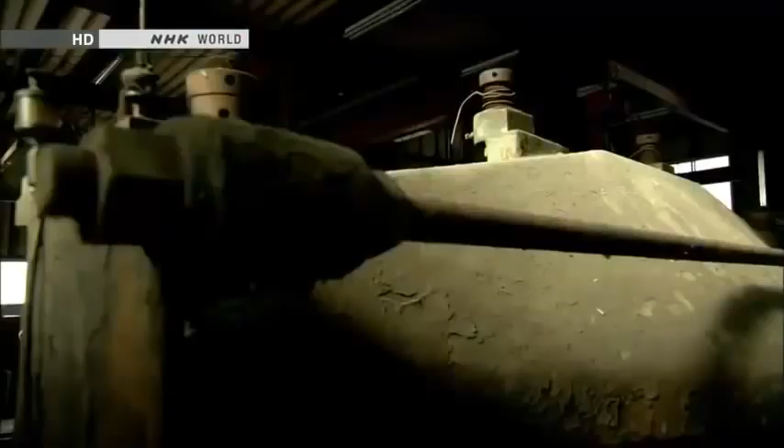In a workshop near Mount Fuji, a curious being has appeared. It's 3.8 meters tall and weighs 4 tons. It is a giant humanoid robot named Kuratas.

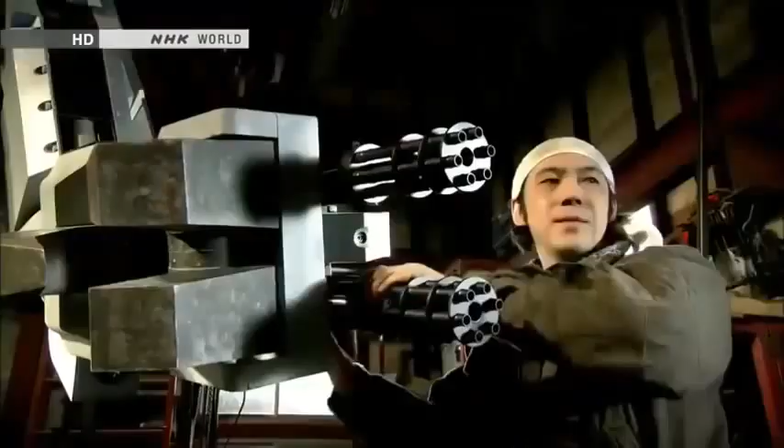Kuratas is a contemporary artist's creation. He holed up here for 2 years, building the robot with input from an expert.

He calls Kuratas a work of art, but it's a sophisticated piece of machinery. A person seated inside can control the robot, move its limbs, and grab things.

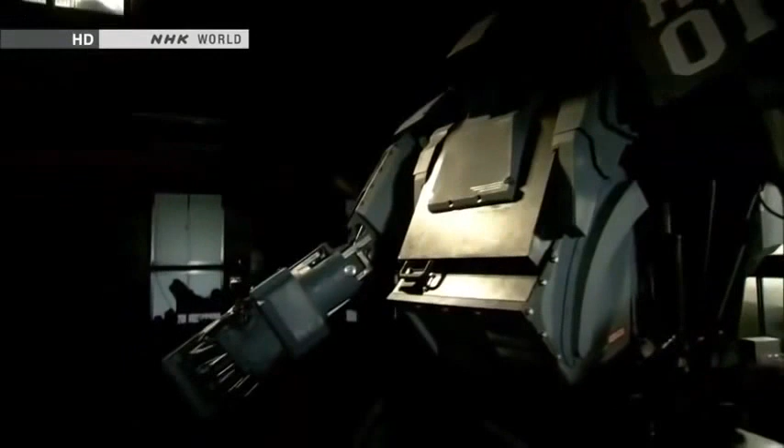The artist says he was inspired by robots in science fiction tales and animation. That vision sustained him as he worked in solitude.

Things that were once unthinkable are becoming real. How will robots evolve? Well, military applications could be one option. They'll probably become more and more like humans. They could surpass us in strength and ability.

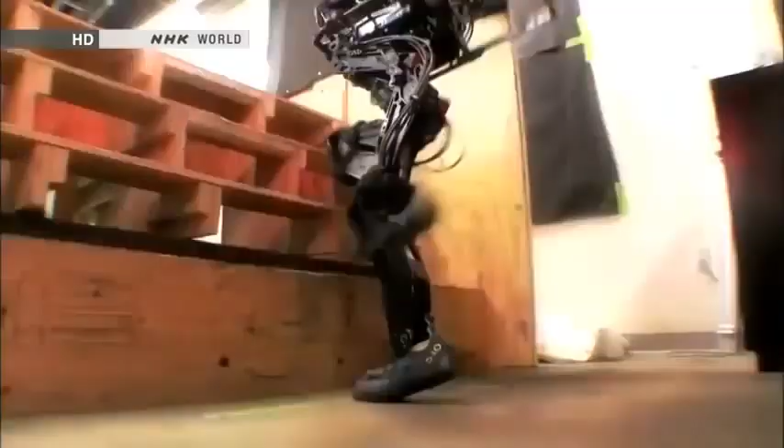People long dreamed of creating these extreme machines. Now, humanoid robots are here. They think like we do, move like we do, and even sacrifice themselves for us.

We want our robot to change society, because robots must be useful. Electronics and computing, progress in vision systems, there's many pieces of it. We will see much more capability continue to grow.

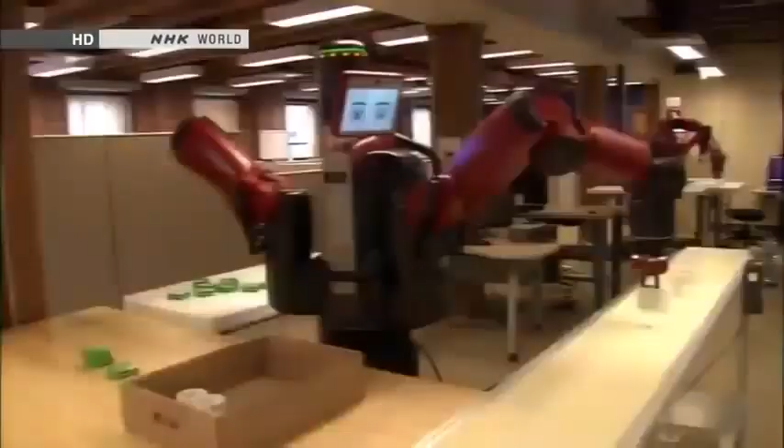Since the Industrial Revolution, people have entrusted some jobs to machines. But there may come a day when humanoid robots do much more complex jobs. Then, what will people do?

You'll see more and more robots doing things in society, whether it's manufacturing or service applications or home healthcare applications. The key will be skillfully dividing labor between humans and humanoid robots.

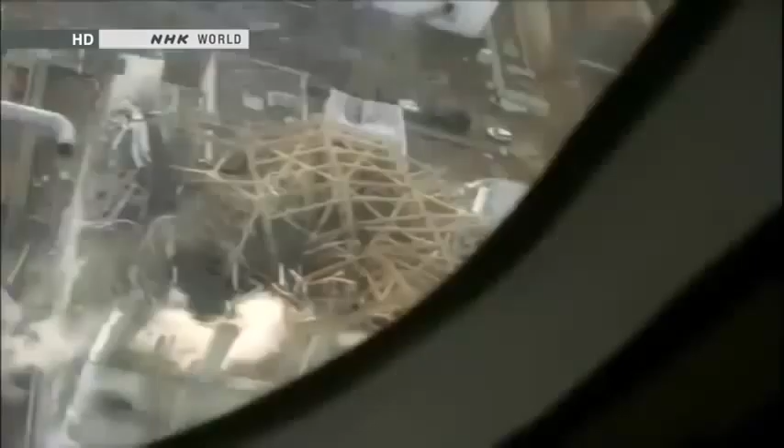The disaster that hit Japan in March 2011 accelerated efforts to develop robots with human traits. The Fukushima nuclear accident left people powerless.

Robots can take over when things become dangerous. They can plow through rubble, climb ladders, even make repairs. People are turning to humanoid robots to handle all of these tasks.

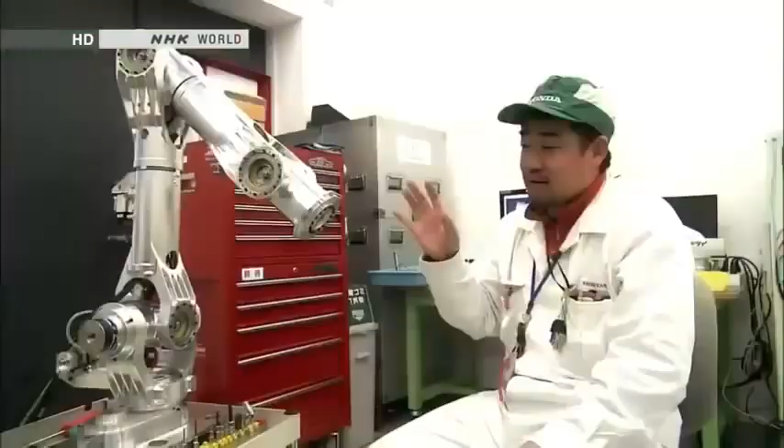We're eager to launch it soon to end the crisis. By joining forces, we can make a truly useful contribution.

Only a humanoid could do it. Or the day will come when robots will really assist mankind. The nuclear disaster in Japan sparked explosive advances in humanoids at the front line of robotics development.

This program explores the future that's fast approaching.

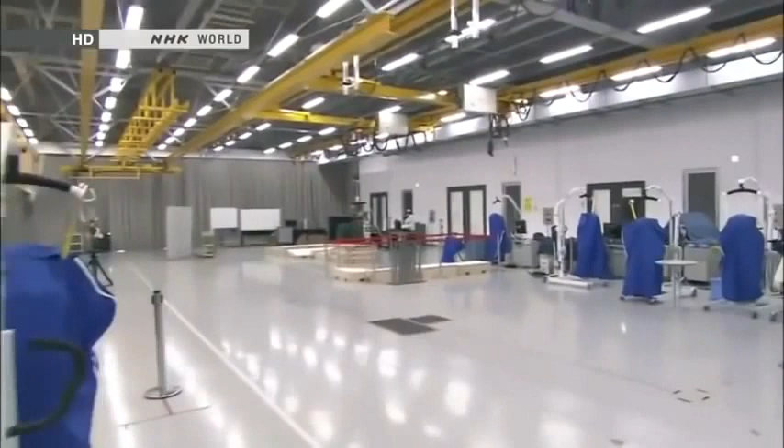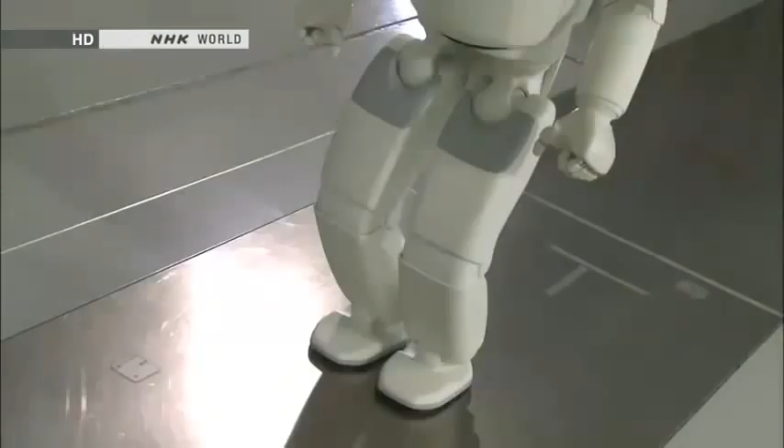Japan is a worldwide leader in the development of humanoid robots. Asimo is the country's crowning achievement. Engineers continue to make improvements.

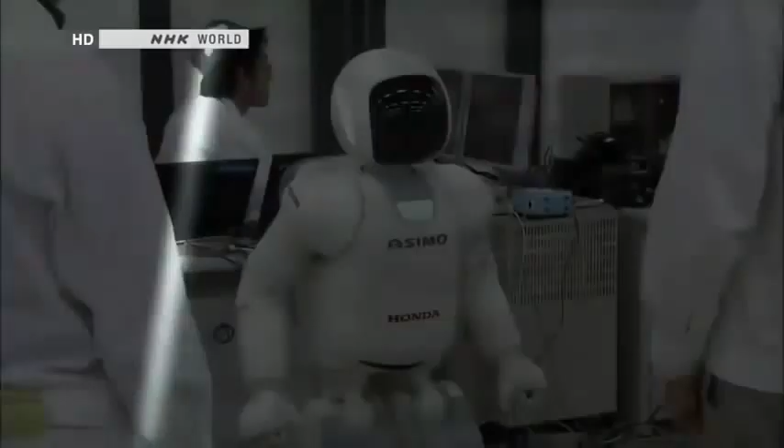Asimo's most innovative feature is its advanced intelligence. The robot can think and act on its own without human intervention. That's made possible by sensors that replicate our 5 senses.

Asimo's head contains 8 microphones. It uses them to listen and engage in conversation.

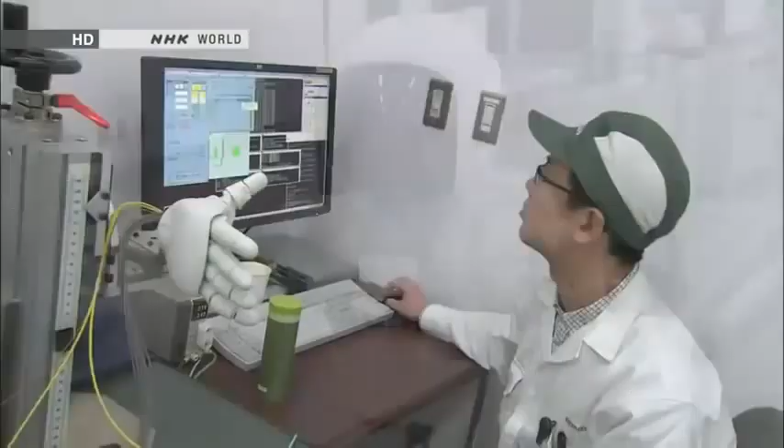Asimo also has a sophisticated sense of touch. Its fingers can make subtle movements, like a person's.

Sensors are embedded in the fingertips, too. They can gauge the hardness of an object, like human fingers do.

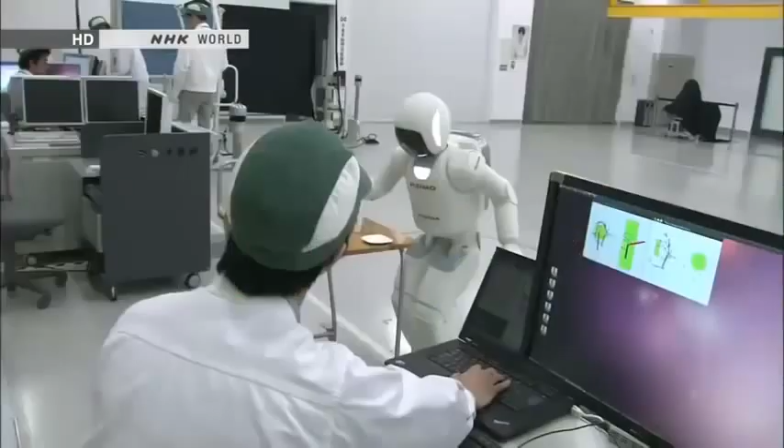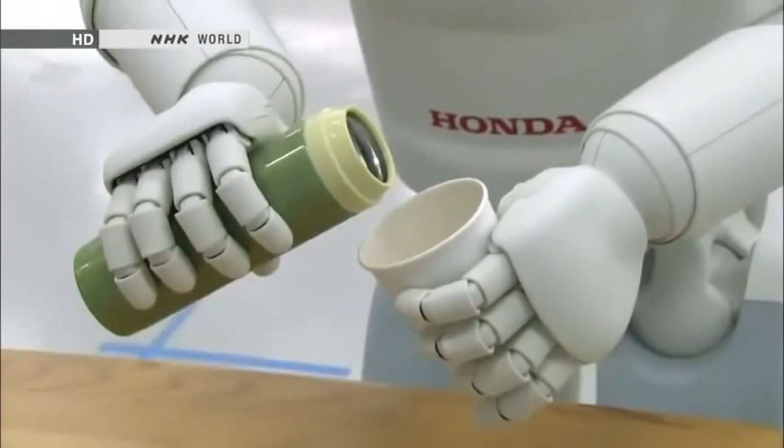Most robots use a fixed amount of strength to grab things. But Asimo exerts more power to open a tightly sealed water bottle and less when holding a paper cup. Its artificial intelligence uses information from the fingertip sensors to adjust the grip.

The developer's ultimate goal is for Asimo to be a valuable partner that coexists with humans.

The engineers who created Asimo all grew up watching animated shows about robots, such as Astro Boy, Doraemon, and Gundam. They dreamed of someday making their own.

Satoshi Shigemi is the development team's leader. He has been designing robots for the past 16 years.

From the beginning, we wanted to design a robot that could help people. To realize that dream, we're constantly asking ourselves, what kind of robot would be able to change society, make people happy, and make life easier for people around the world?

Our idea is to create a robot that will change how people live. We're working through the technological issues, one by one, in order to reach that goal.

Asimo's advanced physical capabilities are revolutionary. The robot can walk and run. It can reach speeds of up to 9 kilometers an hour.

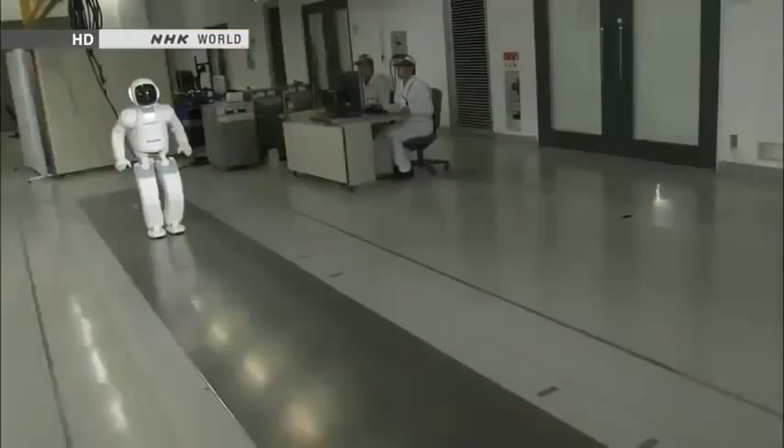For robots, walking is much easier than running. When running, both feet momentarily leave the ground. Balancing in mid-air is no easy task.

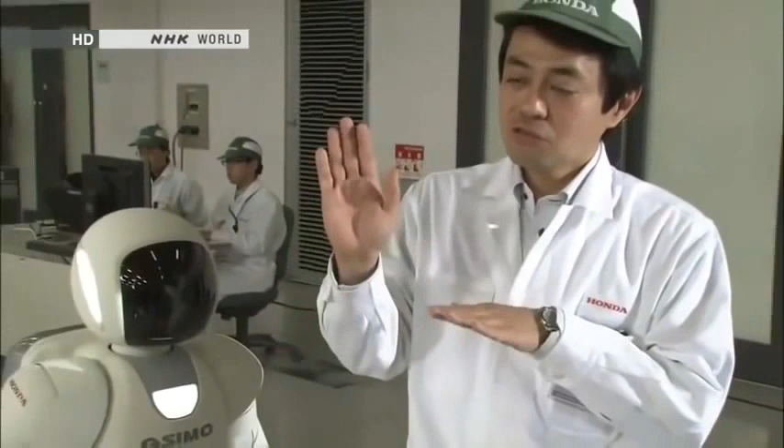Maintaining posture while jumping or floating in the air was a major technological breakthrough. Asimo leans its upper body slightly forward to maintain overall balance. It goes forward straight in the air. Sensors in Asimo's waist measure the robot's angle. It leans slightly to compensate, forward or back, side to side. That's how it stays perfectly balanced in the air.

Asimo has been evolving ever since development began in 1986, much like a growing child. But something happened that made researchers realize Asimo's real-world limitations.

It was the accident at Tokyo Electric Power Company's Fukushima Daiichi nuclear plant. The damaged reactors released radioactive substances, making it difficult for humans to deal with the crisis. People needed something that could confront the dangers and bring the plant under control. Robots.

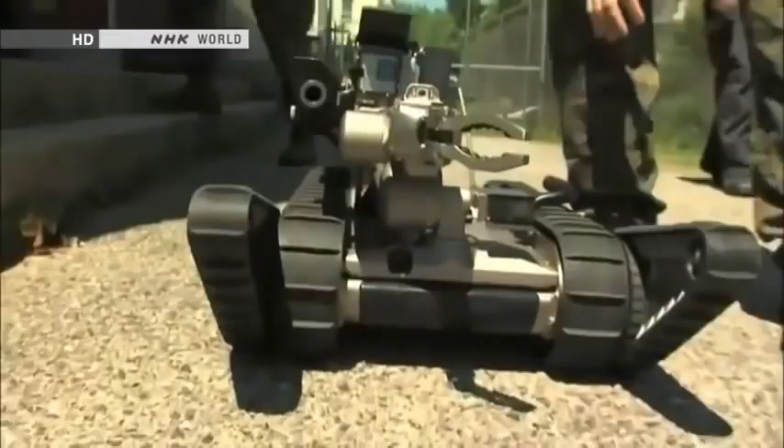Japanese officials sent a request for robots developed by the U.S. military. The robots were sent to Fukushima in April 2011. They recorded images inside the damaged reactors.

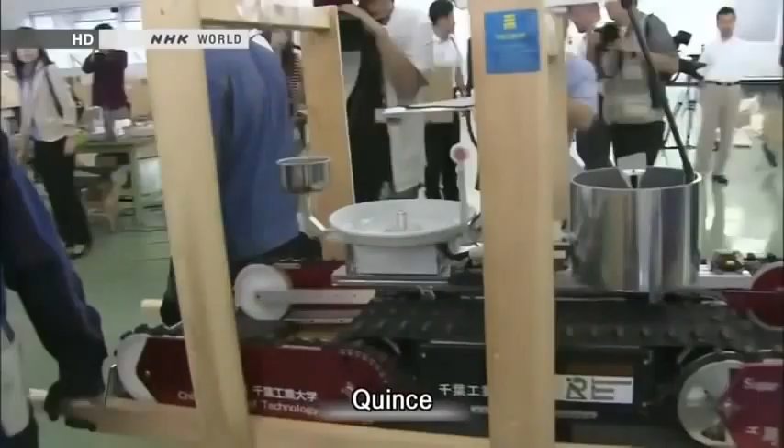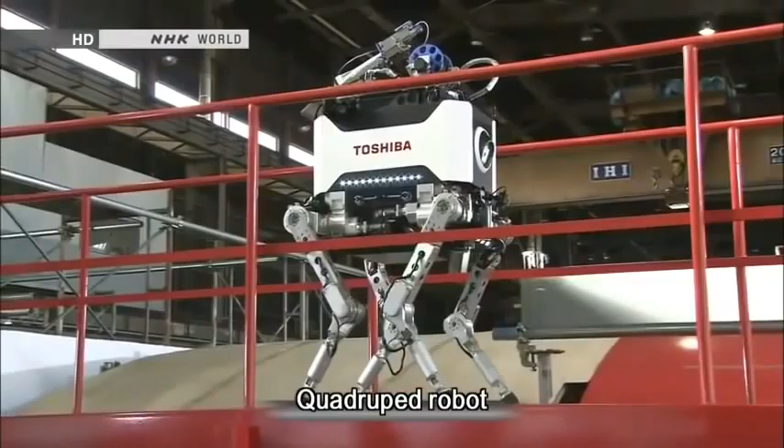Since then, a variety of Japanese robots have been enlisted as well. Robots have proven to be useful, but 2 years after the accident, they're only used for inspections. They're not able to do all the work of humans.

What about Asimo? Right after the disaster, people flooded Honda with phone calls and emails asking the company to send Asimo to the Fukushima plant. But Asimo wasn't up to the task. It could move nimbly over an office floor and other flat surfaces, but large vertical gaps and obstacles were a different story.

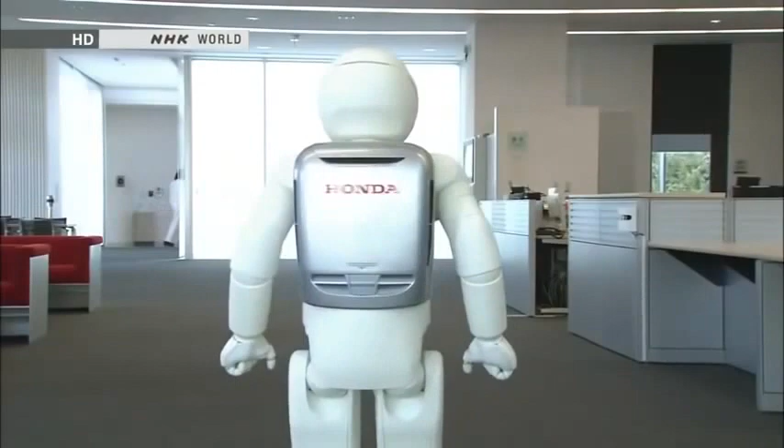We heard from many customers. We ourselves regretted that Asimo couldn't be of help. It was obvious that the Asimo we had built wasn't ready for real-life action. We realized right away that we needed to make something different, something new that could offer immediate assistance.

Honda wasted no time. Company officials offered to create a robot free of charge to assist TEPCO in the recovery. TEPCO accepted. Officials asked for a robot that could open or close valves inside the nuclear plant.

We wanted to flush out radioactive materials that remained inside the pipes and bring down radiation levels in the facility. That was our first goal. Unless we opened or closed the valves, the area would remain highly radioactive, and that would prevent workers from entering the facility and impact the entire decommissioning schedule.

How many valves are there? Each unit has from several thousand to tens of thousands of them. In July 2011, 4 months after the accident, Honda began designing a robot for use at the nuclear plant.

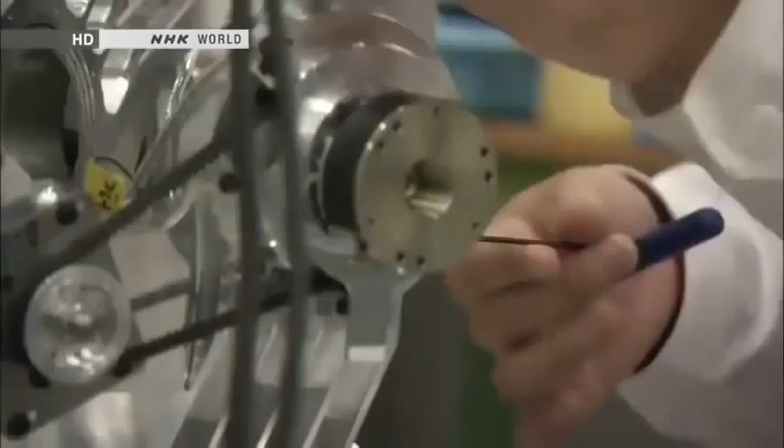Members of the Asimo team were put in charge of the project. A humanoid robot would take too long to build, so engineers focused on making a robot specifically for operating valves. Asimo was crucial to their efforts. Its ankles employ advanced balancing technology. Developers reasoned that using it would allow the new robot to work inside rubble-filled reactor buildings.

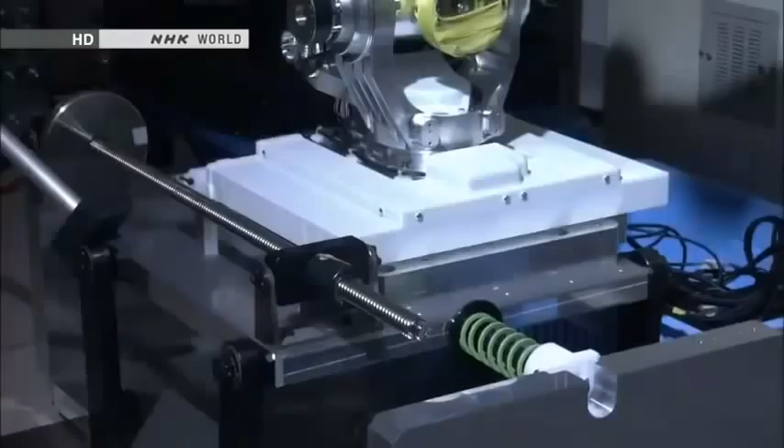The team worked exceptionally fast, completing a prototype in just 4 months. They turned Asimo's leg into an arm for operating the valves. Even when the base moves, the arm remains steady. So far, so good.

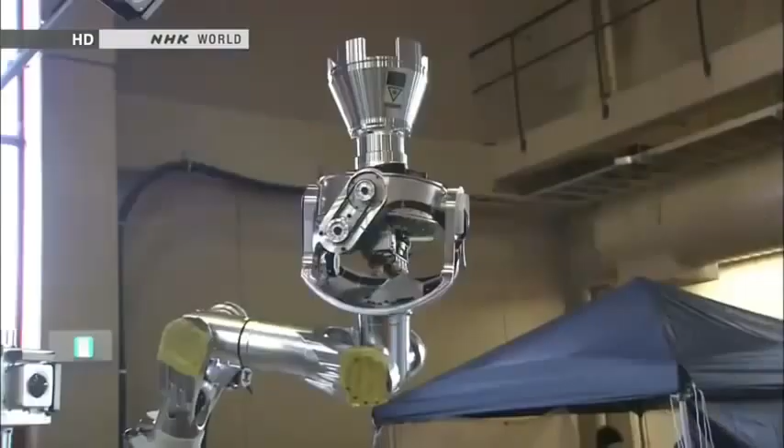Officials from TEPCO evaluated the prototype at the National Institute of Advanced Industrial Science and Technology. The government-backed group for cutting-edge research contributed to the development effort. A TEPCO official couldn't take his eyes off the robot's movements.

We may be quite demanding. That's okay. We might be quite direct. The test is designed to replicate conditions inside the nuclear plant.

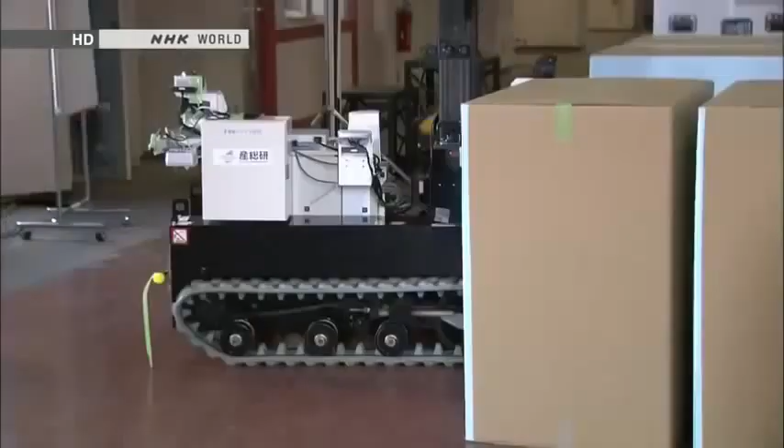The robotic arm is remote controlled. Testers send the arm toward one of the valves. There are a number of unknowns, including the condition of the valves. They may have rusted since the accident. A valve might break if the robot applies too much force, or it might not budge at all.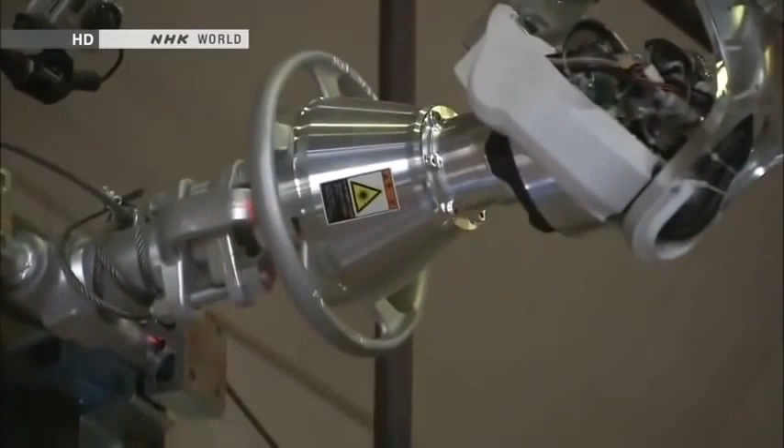The robot uses just the right amount of force and turns the valve on the first try. It's passed the test. This robot can do more than inspections. It could help in the recovery effort.

From what we've seen, the robot seems near perfect. We want to use it as soon as the need arises. It's important that we quickly do what we can to make that possible.

The Fukushima accident also encouraged U.S. developers to design emergency response robots. Department of Defense officials have spearheaded the effort. Before, they had shown little interest in humanoid robots. Now, they view them as vital for disaster response. The architect of the new strategy is Gill Pratt of DARPA. He oversees funding for leading-edge research at the Department of Defense.

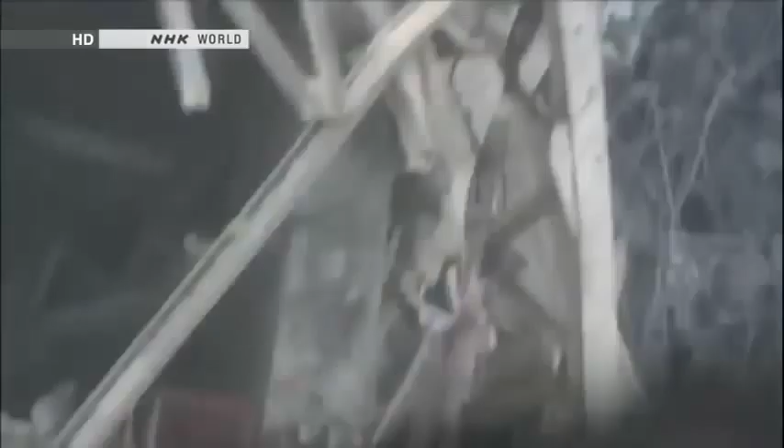There are many aspects of disaster response in Fukushima that inspire people in robotics to work on new capabilities. If they were able to take action during those first 24 hours, then the first reactor maybe would not have blown up in an environment that is too dangerous for a person to do.

What's important to us is that the robot is compatible with human environments, compatible with human tools, and also compatible with human operators without special training. As a result of that, the easiest form that comes to mind is the human form. DARPA is backing the development of a humanoid robot for catastrophes, such as nuclear power plant accidents.

This company is leading the development work. It has already built several military robots. Okay, I'll show you the current status of the robot.

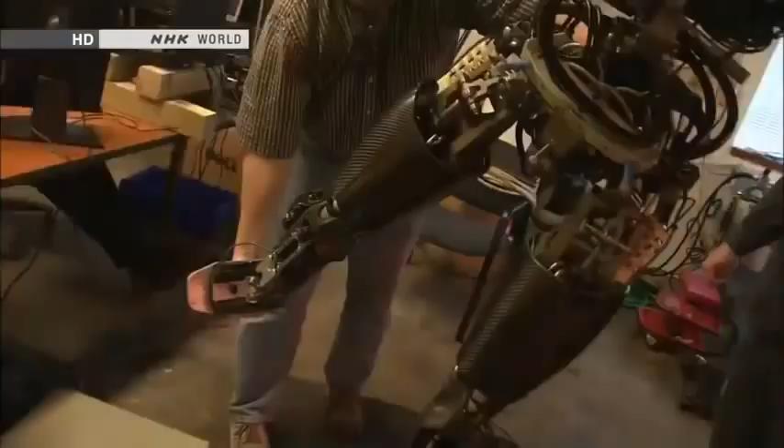This is the first American-made humanoid robot for disaster response. It's called Atlas. Before, U.S. designers had focused on robots with specialized functions.

Why the sudden interest in humanoid robots? Traveling over debris, prying open valves, using tools for repairs. Performing multiple tasks like these is impossible for specialized robots. Crises also require robots that can navigate doors and stairs. Humanoid robots are ideally suited for such situations.

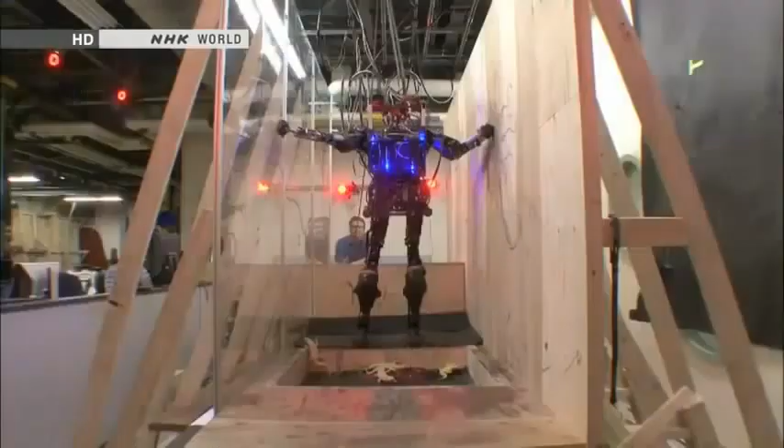Tests of this prototype were going smoothly. It can easily climb stairs and jump from a height of nearly 1 meter, and can negotiate obstacles using its arms and legs. It can already handle more demanding environments than Asimo can.

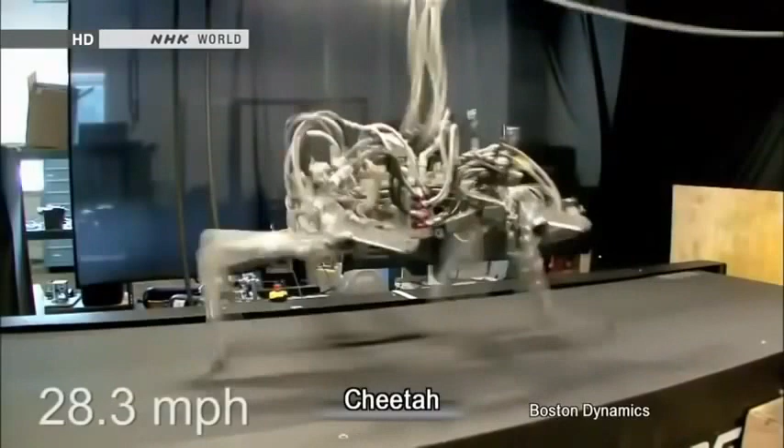Atlas is loaded with technologies originally designed for military robots. A quadruped robot called Cheetah can race through a battlefield at 45 kilometers an hour. LS-3 is for transport; it can carry heavy supplies for soldiers.

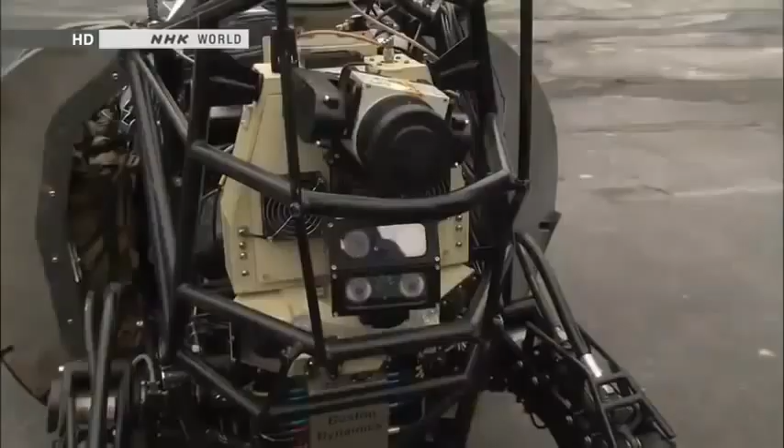The ferocious-looking robot gets its strength from a powerful hydraulic drive system. A hydraulic device can be small, yet quite strong. The black cables convey hydraulic power to the legs, generating the brute force required for harsh conditions on the battlefield.

A web of hydraulic cables covers Atlas's body. They form a muscular suit of armor for clearing debris.

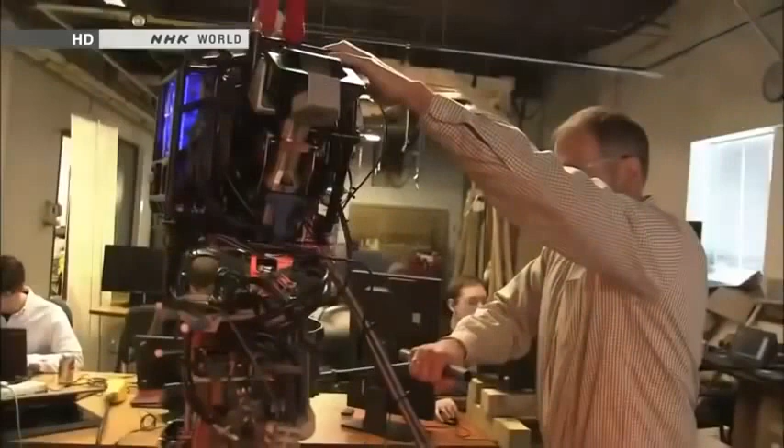Another important technology comes from military robot engineering. This machine's joints have a wide range of motion, allowing for flexibility that humans can't achieve. Atlas's joints are capable of moving in 28 different ways. Atlas can crawl through narrow spaces and withstand sudden shocks.

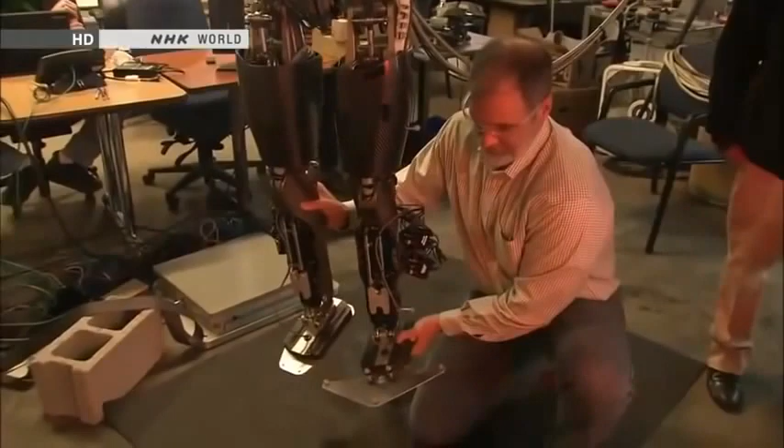Then we have the knee. This has 3 in the hip, just like us - this way, and then this way. I am very impressed with the number of degrees of freedom; it will be able to do these human-compatible tasks without a lot of the limitations that other robots have.

Engineers will combine Atlas's rugged body with sophisticated artificial intelligence that's almost near completion. They aim to complete the robot by December of next year.

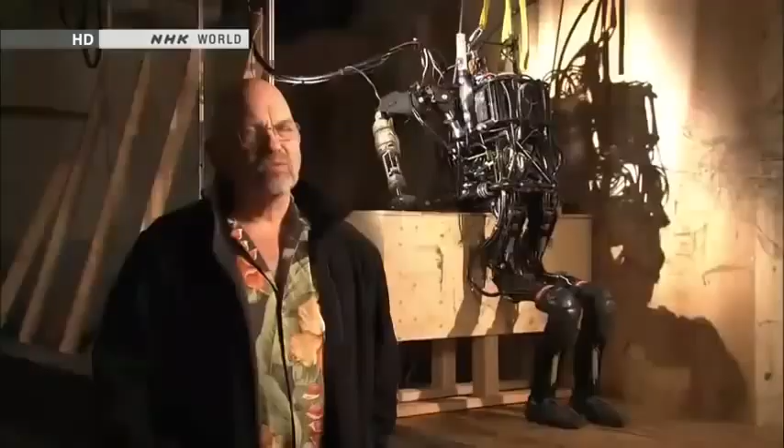One reason you see humanoid robots is because there are some people working who are really interested in robots as an entertainment thing or as a performance thing. I think that's different. We're much more interested in basic capabilities for emergency response, rescue. So I don't think Asimo has been designed to do those things yet.

U.S. engineers stepped up their efforts to develop humanoid robots after the nuclear accident in Japan. Japanese researchers are embracing the same mission.

In November 2012, robot engineers from around the world gathered in Osaka for an international conference on humanoids. Gill Pratt from DARPA was one of the participants.

He came to invite engineers to join a project sponsored by the U.S. Defense Department. On March 11th, after 24 hours, if only a robot had been there to go and open that valve, the entire disaster could have been averted. But we didn't have one, and furthermore, we didn't have anyone that could do the job. So shortly afterwards, we actually started planning the DARPA Robotics Challenge.

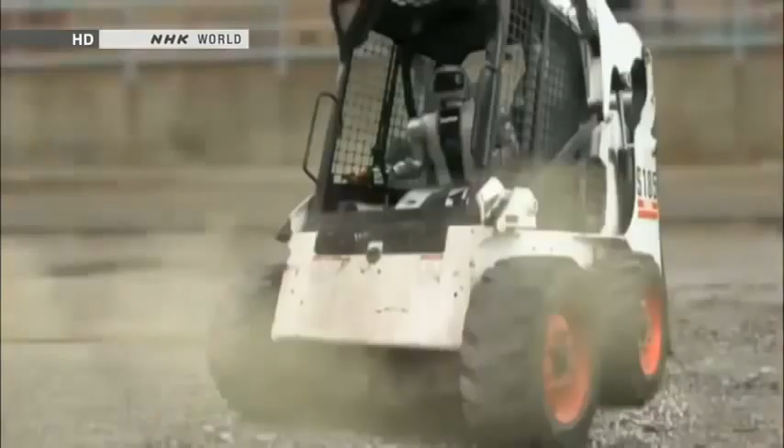The challenge consists of 8 tasks: driving a vehicle to approach a disaster site, walking over rubble, removing obstacles, opening doors, using tools to break down walls, climbing ladders, turning valves, and making repairs.

A single robot must complete all 8 tasks. The development period is 2 years. DARPA will provide contestants with funding of up to $4 million.

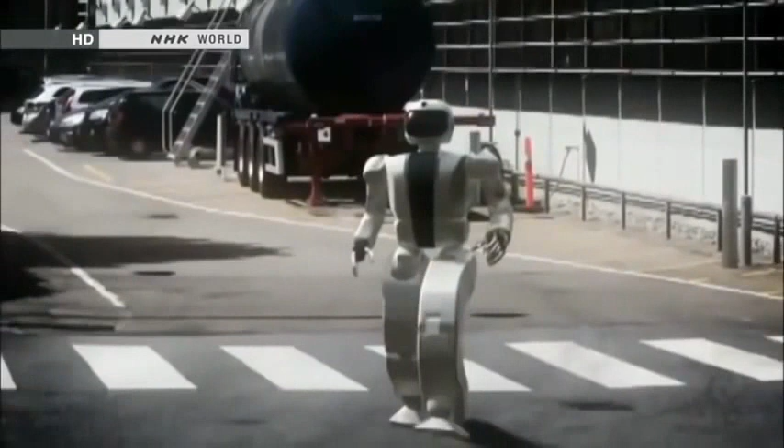DARPA has received over 100 proposals from research groups worldwide. They include renowned organizations like NASA and MIT.

Japan is at the forefront of humanoid robotics engineering, yet its researchers hesitated to throw their hats into the ring.

So actually, to me, it's difficult not to see that some of the results of the DRC are going to be used to advance, as you say, advanced military technology.

The DRC is about developing robots that I believe wholeheartedly are completely impractical for military purposes, for offensive military purposes. Will the technology that we come up with find its way into military systems? Probably yes. But I guarantee you that if you work on a robot for healthcare, there's a chance that technology will also find its way into military systems.

The members of one Japanese research institution wanted to take part in the competition.

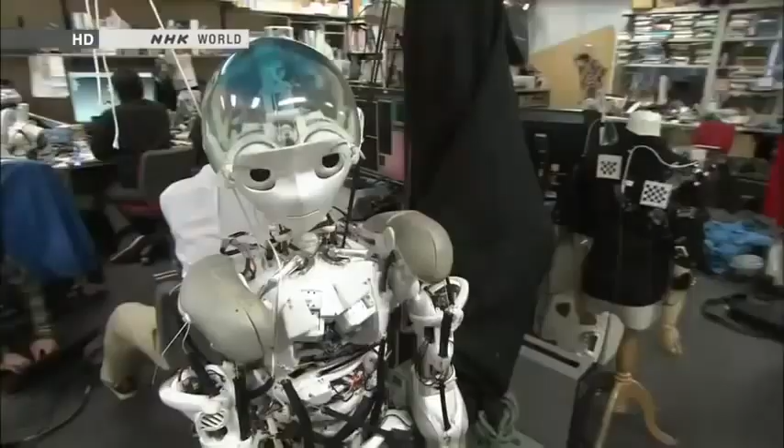They worked at the University of Tokyo's robotics lab. Researchers there, along with those at Honda, are global leaders in robotics engineering. But they faced a major obstacle to competing: the university bans military-funded research. Three researchers made a decision. They told the university they were leaving, then decided to set up a venture company and enter the DARPA Robotics Challenge.

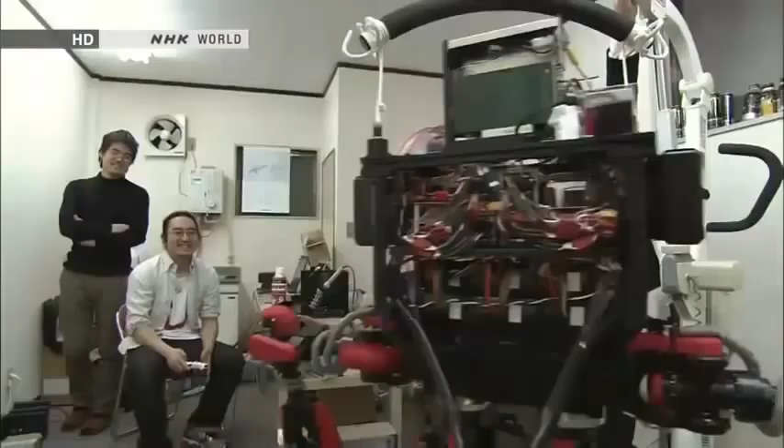They couldn't shake the feeling that they should leave their quiet university lab and help resolve the nuclear crisis. Six months after launching their venture, the team had just completed a prototype with help from university graduates. Its long arms can exert 10 times more force than those of conventional humanoid robots.

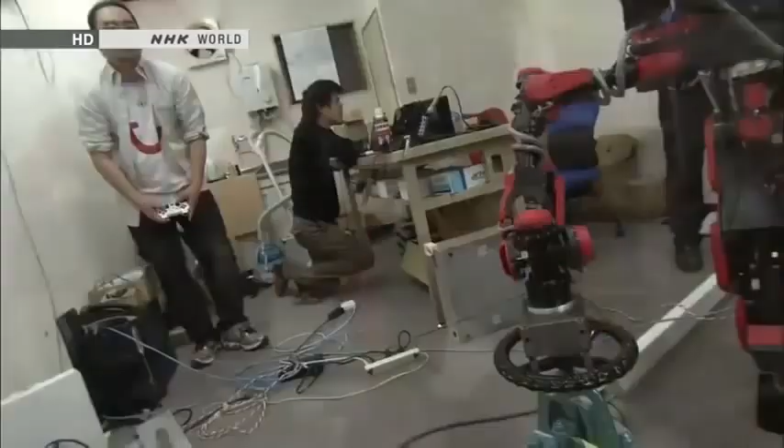It's too tight to turn with one hand. It can easily turn a valve that's too tight for a person to turn. The strong force comes from a large electric current that pushes the motors to their maximum limits.

A reddish fluid circulates through the robot's body. The fluid serves as a coolant that keeps the motors from overheating. The cooling system should enable the robot to perform hours of grueling work at disaster sites.

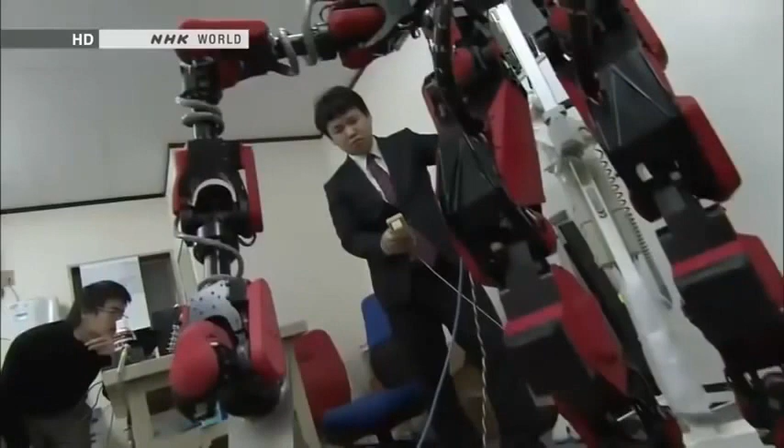The time has now come for the developers to apply their years of research to the real world. A nuclear crisis has happened here in Japan. Radiation is escaping. Researchers in every field must wonder at least once if the technology they've been working on could help resolve the crisis. By joining forces, we can make a truly useful contribution. It's with this in mind that we decided to enter the competition.

One country is quickly catching up with Japan in humanoid robotics: South Korea. KAIST is a government-funded lab for the advancement of science and technology. Researchers there were among the first to express interest in DARPA's Robotics Challenge.

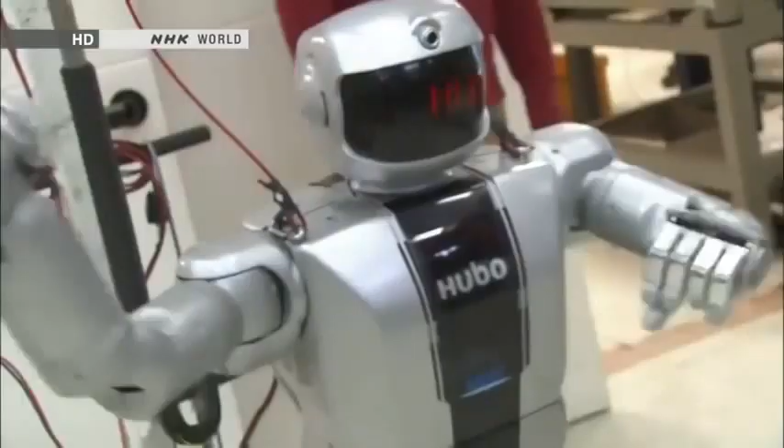This humanoid robot is called Hubo. It's modeled on Asimo, which Honda spent 14 years developing. Hubo was built in just 5 years. Hubo deftly manipulates its hands, and it's also good at dancing. Its moves look just like Asimo's.

Hubo has been undergoing a major upgrade ahead of the competition. It can now bend backward at the waist while walking to handle all kinds of environments. It can quickly pick up tools. The tests were going well.

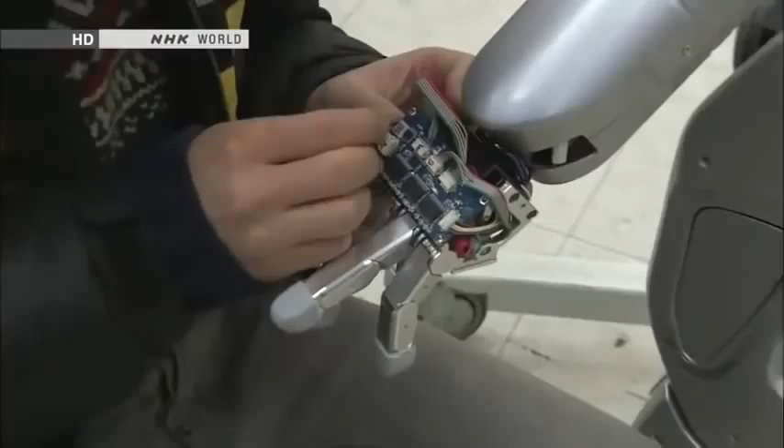People have always compared Hubo to Asimo. Engineers now had a strategy to get ahead of the Japanese developers. They decided to publish certain details about Hubo's design and pursue joint development with researchers at other institutions. One could say that this space inside Hubo's chest captures the heart of their thinking.

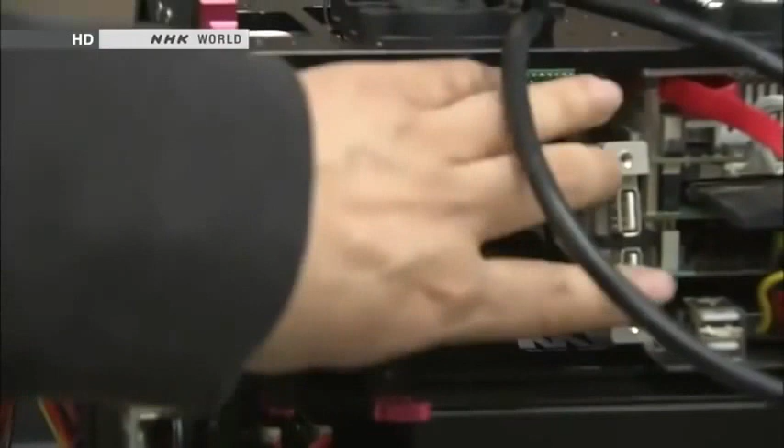It's empty now, but this is where artificial intelligence will be installed. It's removable. Hubo does not yet possess artificial intelligence. Its motions are as sophisticated as Asimo's, but Hubo's movements are all pre-programmed.

U.S. universities that lead research into artificial intelligence will develop a brain for Hubo. The stage has been set for a joint U.S.-South Korean team to compete in the DARPA Robotics Challenge.

Sharing is the key to making technological advancements. That's true in South Korea and in other places too. Research shouldn't be confined to one place. People developing humanoid robots elsewhere are too close-minded.

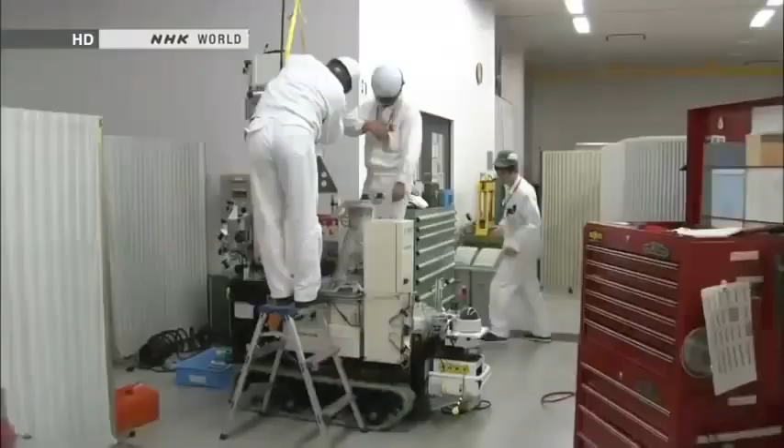Researchers at Honda were also invited to enter DARPA's competition, but they declined. Their energies were focused on designing a robot to tackle Japan's nuclear crisis.

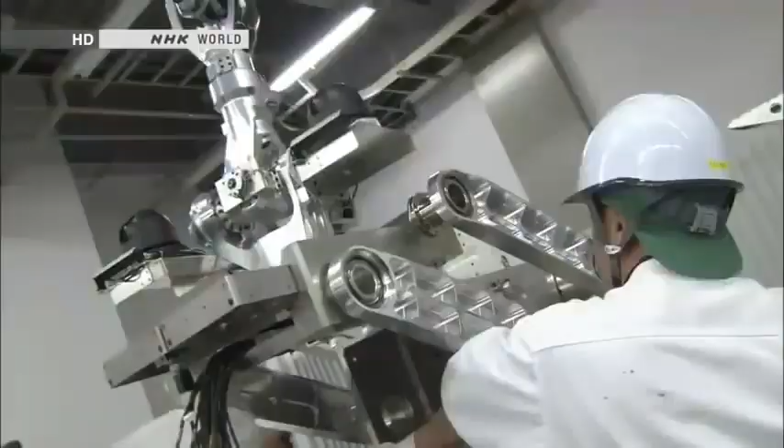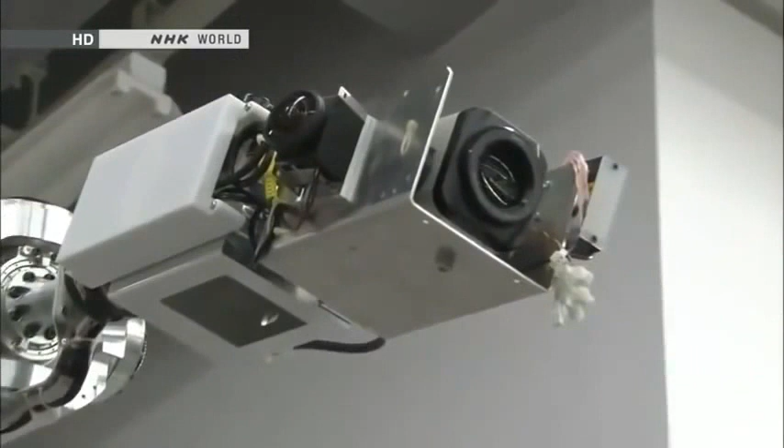Nearly a year has passed since Honda's robotic arm passed evaluation tests, but the device has yet to be deployed to the nuclear disaster site. That's because officials at TEPCO requested a change in specifications. Engineers have replaced the valve-turning hand at the end of the arm with a camera.

TEPCO had changed its plan. Officials decided to put priority on assessing conditions inside the plant's facilities. They said it was too early to have robots work on valves. There wasn't even a recovery plan in place when we were working out the valve manipulation tasks.

Confusion also prevailed at the site. We were expecting valve work to begin 2 to 3 years after the disaster. But the timing has ended up being later than what we'd assumed, 1 month into the crisis.

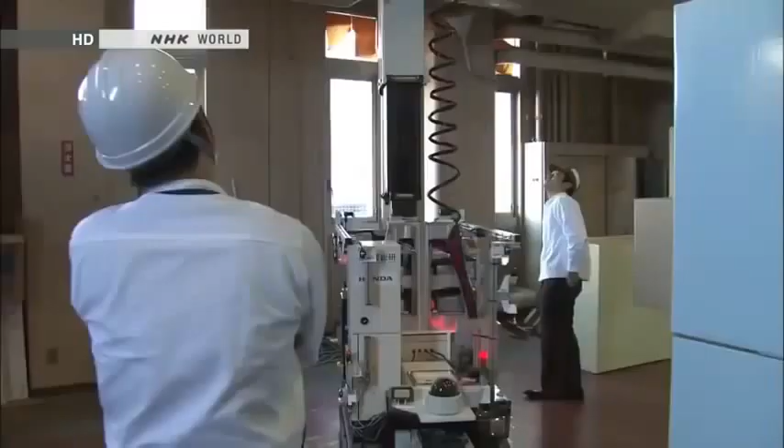The robotic arm will soon be sent to the accident site. It will provide the first images filmed from high up. The robotic arm was not the end of Honda's efforts. Its engineers had another secret mission.

They would develop a new humanoid robot, an updated version of Asimo for use in disasters. The site where the Fukushima disaster took place is dark and off-limits to humans. Only a humanoid robot with both intelligence and motor skills could climb over the debris, get to the accident site, and perform the work of people. In other words, a robot like Asimo.

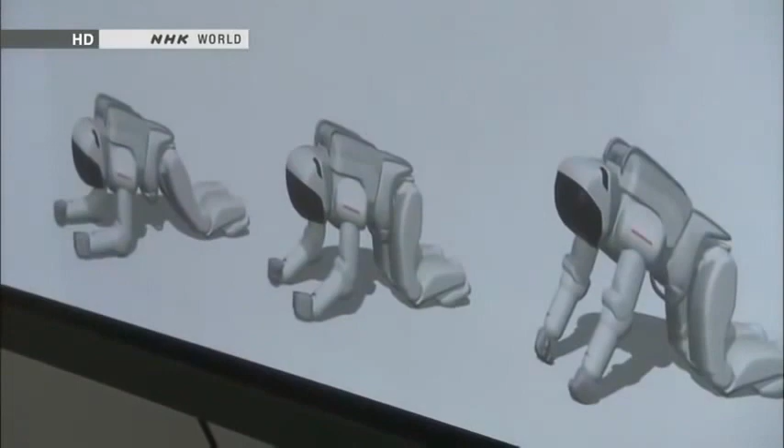Let's use our skills to make a humanoid robot that can tackle disasters. Asimo's engineers were united by this idea. The robot they envisioned would not only walk, but also use its arms to crawl. It would use every means possible to reach its destination. A dramatic update would be necessary.

A disaster reduction robot would be useless if it couldn't get to the site. It's important to get to the scene no matter what. Disasters create all kinds of debris that crumbles easily or breaks when stepped on. It's because it's dangerous that robots replace humans. That's what makes them valuable. A robot that couldn't get to the scene would be totally useless.

Honda's engineers began developing robots in 1986 with the goal of making people happy. 27 years of research is now being put to the test. As we saw in the Fukushima Daiichi crisis, the bottom line is that robots can stand in for humans in places that we can't go to, or that are too dangerous. I am committed to delivering what's needed, when needed, in the shortest amount of time.

The accident in Fukushima spurred the development of humanoid robots around the world. The disaster also prompted people to question the roles of humans.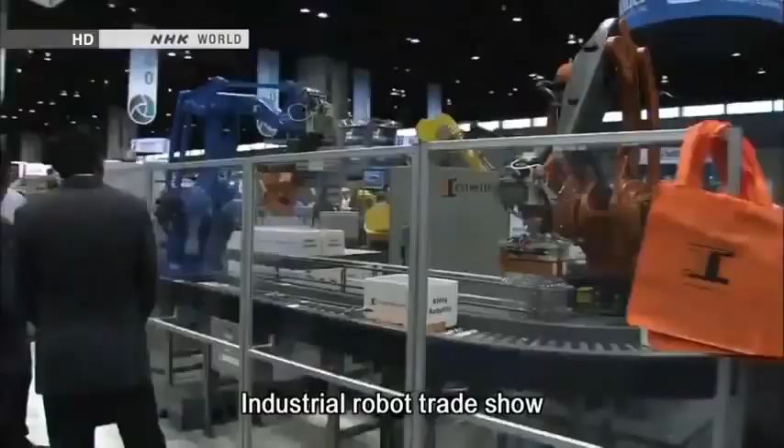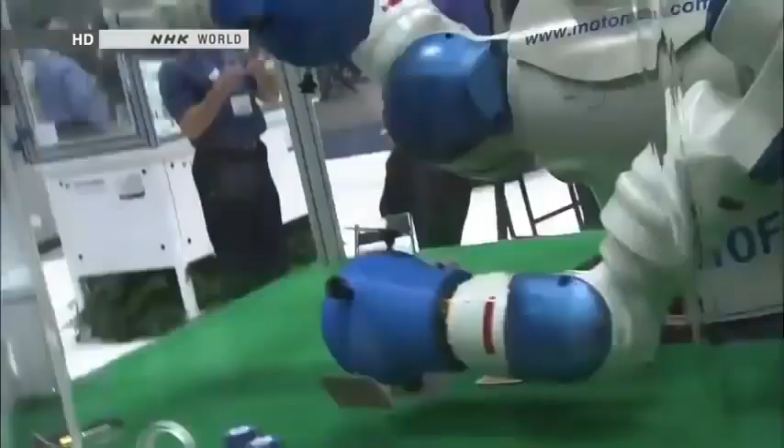One of the largest trade fairs featuring industrial robots took place in January. Global manufacturers displayed their latest models. Companies are developing more and more two-armed humanoids for industrial use. One new product at the event caught a lot of people's attention.

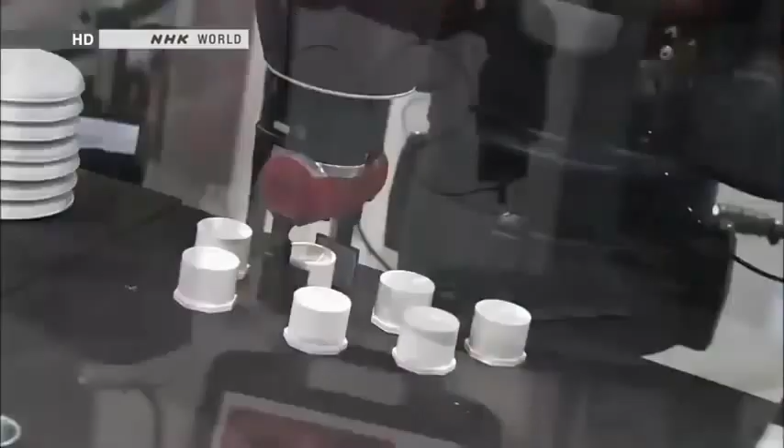Baxter was created by the inventor of a best-selling cleaning robot. It's equipped with sophisticated artificial intelligence. Baxter is designed to work side by side with people in factories and other settings. The robot's most unusual feature is its ability to master a task in a matter of 5 minutes. All that's required is step-by-step manual instruction. No complicated programming is needed.

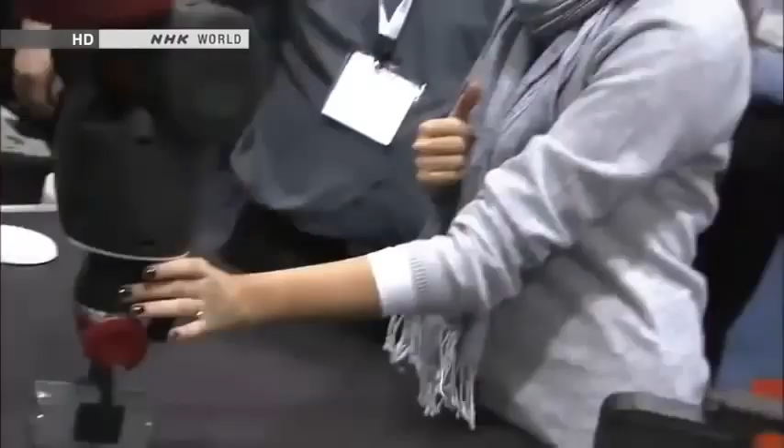Let's pick up this part. So you bring the arm to the part. Yep, just like that. So we have the part. Close the grasp. Yep. Grab the arm and bring it to the table.

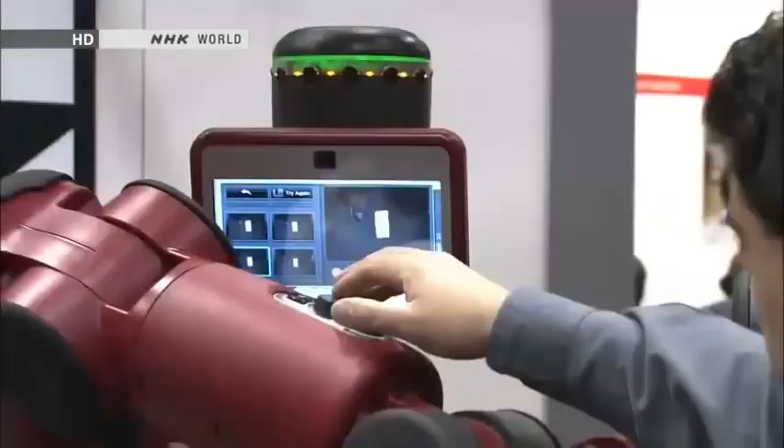So you just pick, either pick and place. And at this point, you're already able to do the task. So if you, I can move that over there. It's going to look for the object. You can do this task back and forth, and you've already built some common sense. You really need to grab Baxter. You'll eventually have possibilities for that. We can do it ourselves. Sure.

The expression on the face on the LCD screen shows whether or not the robot has understood the task.

Baxter costs $22,000, a bargain for a humanoid robot. The maker says buyers can recoup their investment in several months and slash labor costs. I'm very impressed with it. I work for a small manufacturing company, and we have some older employees who are looking to retire, and there's some tasks that Baxter could do for us very effectively. Plus, it would be cheaper than employing a person.

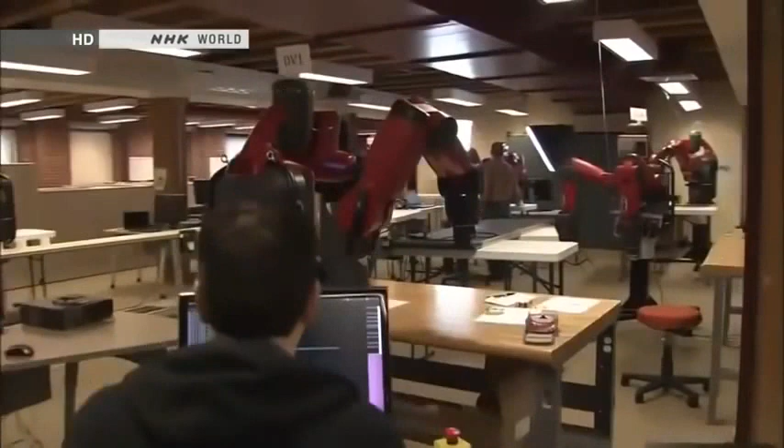It's not going to get tired. It's not going to need to stop. It'll keep running while everybody else is taking their lunch. The Boston-based manufacturer has a flood of back orders.

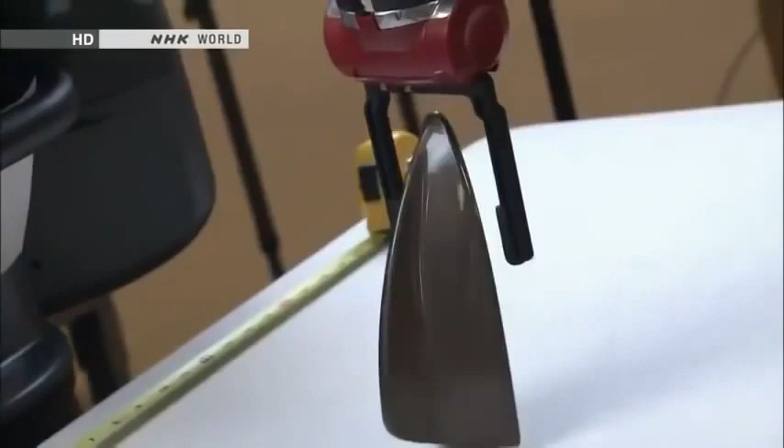Officials say someday Baxter will work at places like coffee shops, taking orders and grilling burgers. Eventually, they expect to have 500,000 U.S. customers.

Today we're focused on manufacturing, and there's a very big opportunity in manufacturing, but there's lots of other places that a robot like Baxter could go. We had the Industrial Revolution at the turn of the last century. We've just gone through the computer revolution, effectively at the turn of the most recent end of the century. We are now into the robot revolution. Will people and robots someday compete for jobs?

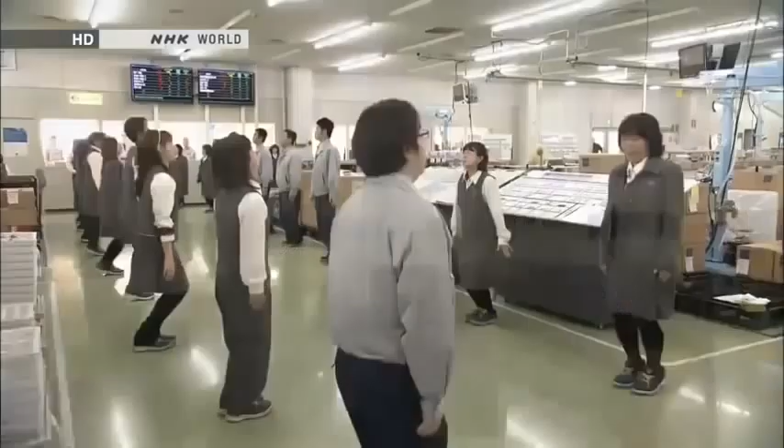At 8:30 one morning, a group of new employees takes part in daily morning exercises. They are 13 humanoid workers called NEXTAGE. This company began using the robots in earnest last year. They have 2 eyes and are just like humans. They're cute!

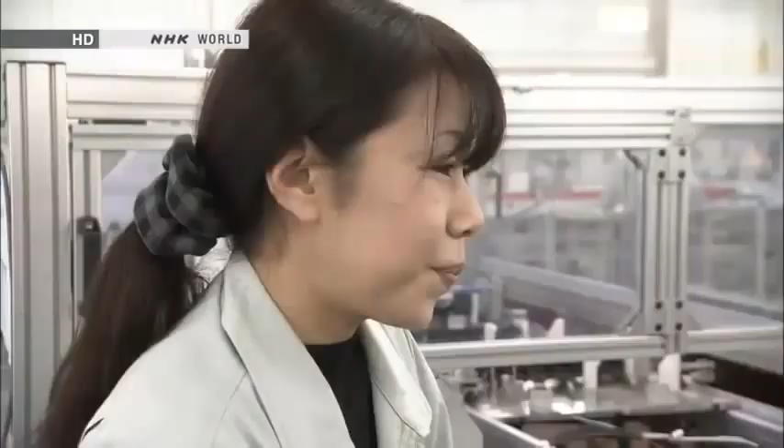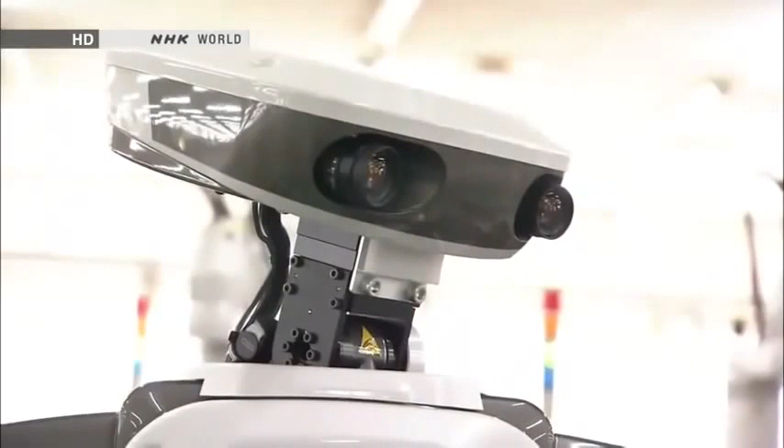This factory manufactures money sorting machines for cash registers. The humanoids work on a production line that was previously manned entirely by humans. The robot visually confirms the parts set in place by a human worker, then it begins its task.